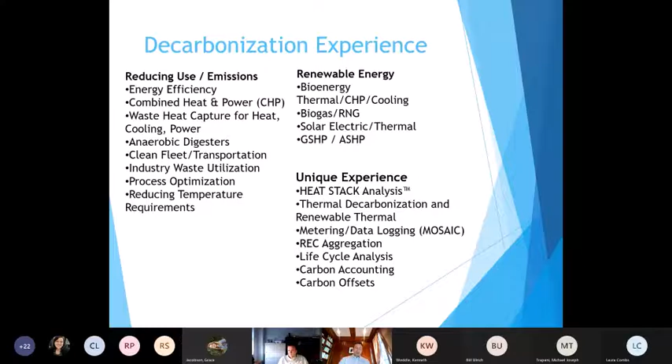Now, a quick outline of the presentation. I'm going to start by getting into very briefly the emission scopes so everybody's on the same page with that and why it might matter to a business. I'll spend the bulk of the time talking about how you would decarbonize. Scope 1 is what I'll focus on mostly because that's usually the hardest for an industrial facility to decarbonize, but Scope 2 as well a little bit. And at the end, I'll get into some tips or thoughts we have, having done this for a while, that you might find valuable as you go about your process of decarbonizing your facility.

So just very briefly on the scopes themselves. Scope 1 emissions are direct emissions by your business at a facility that you control. And so a real easy one to conceptualize here would be a natural gas boiler. The emissions out of the stack from that at your facility that you own are ones that fall into Scope 1.

Scope 2 is indirect emissions from energy purchases, usually going to be electricity. And so a real obvious one there is you purchase electricity from the grid and there's a power plant somewhere else that someone else controls that's emitting. You have to own part of those emissions.

And then scope 3 is upstream and downstream of your business. So think supply chain and distribution of products. And again, I'm going to focus mostly on scope 1 and a little bit on scope 2 today. Now, why might this matter to your business?

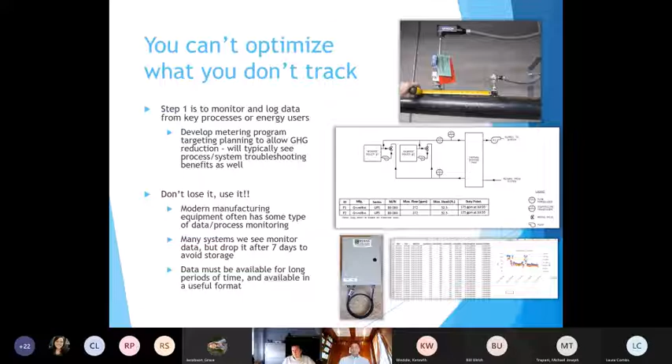It's pretty interesting. We go to a lot of facilities, and there'll be maybe one guy who knows how to get some of the data, and they're on vacation usually when we show up somehow, and then other folks aren't quite sure what they actually track, but they can probably tell us when the guy gets back. That is not a problem mostly for how folks run their facilities now, if you're working that way. But if you really want to decarbonize, that kind of thinking process in terms of how valuable that data is, is something we would suggest thinking pretty hard about.

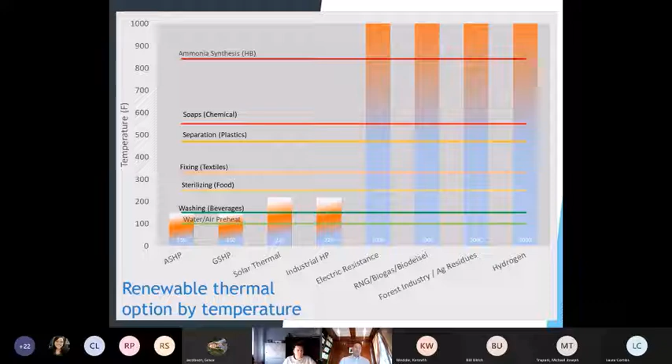I'm going to spend quite a bit of time talking about temperature now and how it impacts Scope 1 and some ways that you might approach it for your facility to help drive decarbonization. Now, if you look at temperature across all manufacturing in the entire US, around 30% of thermal demands that we meet in manufacturing in the country don't require anything more than 212 degrees. But in a lot of the facilities that we work in, folks are meeting these lower temperature needs with the same steam or other process heat source that they have that's really maybe 400 degrees, something like that. And that's not a problem. In fact, there's a lot of good reasons to do that. But if you're trying to decarbonize, we're going to show you why maybe that's something to rethink.

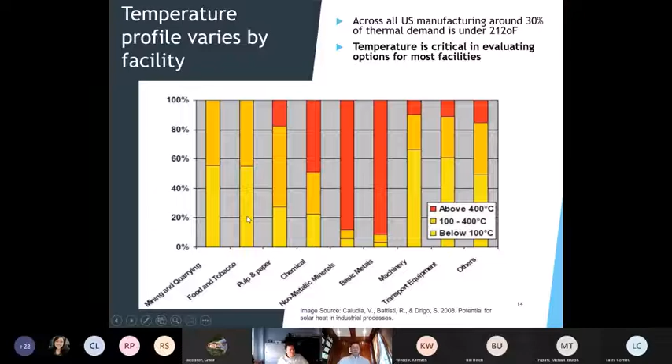And here are some other industries. This data is getting a little bit old, but it probably hasn't changed much. You can see some industries that tend to have bigger portions of their energy demands able to be served by lower temperature energy sources.

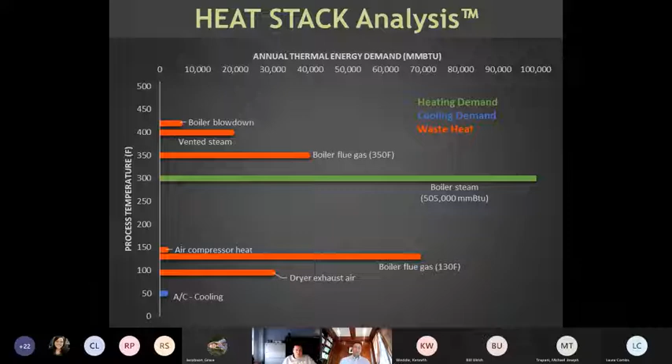In the red, we're tracking what the waste heat is leaving the facility and at what temperature it is leaving the facility. And then we have a little bit of cooling demand at this facility as well. So looking at it from what can we serve with lower temperatures: do we actually need 300 degree steam to serve the thermal demands in this facility? If we dive into the processes, track things a little bit, and look at actual temperatures and mass flows, we can figure out that we can segment out 25% of the total energy in this facility that we can meet with a temperature lower than 300 degrees Fahrenheit.

And in fact, if you look at things like the boiler makeup water, we've put that at 230 degrees roughly. That's where deaerators usually run, which is around 5 to 7 pounds of steam, 5 to 7 PSI. So if you're bringing in this water from a river and it's 45 degrees, you can actually stuff quite a bit of heat into that pound of water prior to it being 227 degrees. So really you could serve a bunch of that load with lower temperature as well. So anyway, these are the temperature profiles we picked for this facility. We took 25% of the natural gas use at the facility and said, all right, we can serve that with something that's a lower temperature.

Now, because we've been able to look at this heat stack analysis, and we see at what temperatures we have different heat sources and how much on an annual basis in terms of million BTUs we've got, we can figure out that we can capture some of this waste heat and stick it into these mass flows coming into the facility to essentially preheat them before they hit the process and our boiler steam. By doing that, at this facility it works out to around 18% of the total gas use we can just get rid of, because we can capture waste heat and use that to preheat lower temperature things and stop using 18% of the natural gas at the facility right off the bat.

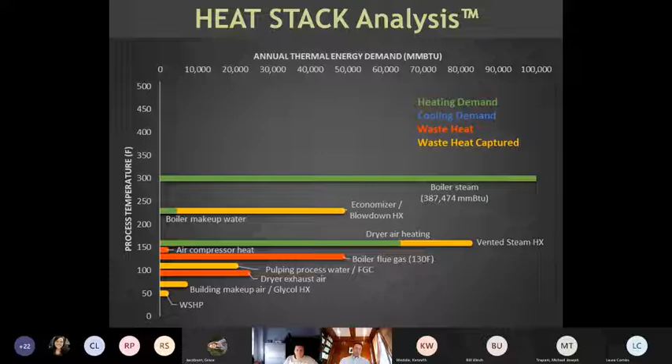The other thing we've done now, because we've looked at this in a more optimized way, is that we can see we still have some green here that we need to heat. Looks like here some dryer air. And we can do that with lower temperatures because that needs to be about 160 to 170 degrees. Now we can look at these options: which ones are renewable, which ones have the lowest greenhouse gas emissions, and which ones have the lowest cost. Now, 75% of the energy in the facility is still boiler steam, so we still have to tackle that. But we've done quite a bit of good for ourselves, and we can get a lot of this done in a way that saves us money as opposed to costing money.

So if you want to replace your natural gas use at the facility for the remaining 75%, now you might be looking at something like renewable natural gas, which in pretty much all cases is going to 2-3x or more your spend on natural gas on a per million BTU basis if you want the renewable version of that.

Now, again, we have opportunities like forest industry residues and things like that we can look at that can possibly save us money and be more of a silver bullet for us. But this general approach is one that we think is important if you're really going to try and decarbonize in a way that's cost effective for your facility.

And I'm going to spend more time talking about temperature. So it might become ad nauseam for folks, but I kind of enjoy talking about it. So we're going to talk about temperatures more and further, and why it's really valuable on a technology basis, by decarbonization technology, why it's valuable to have lower temperatures.

So a nice one, and this is energy efficiency, people have been doing this for a long time, is condensing boilers. And you can condense other exhausts as well. So we think it's really great to go in and get like dryer exhausts and things with lots of latent heat in them and get that latent heat pulled out and stuff that into energy mass flows that are coming into the facility somewhere. But this is a good example.

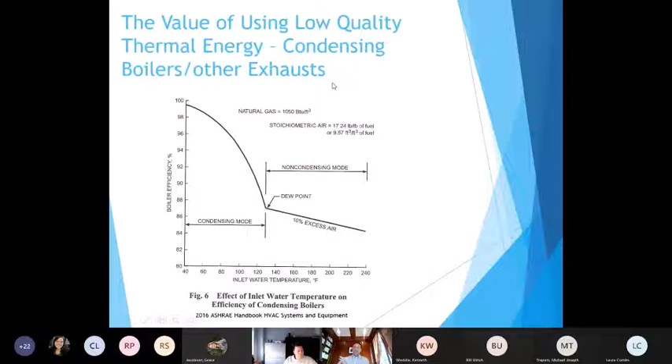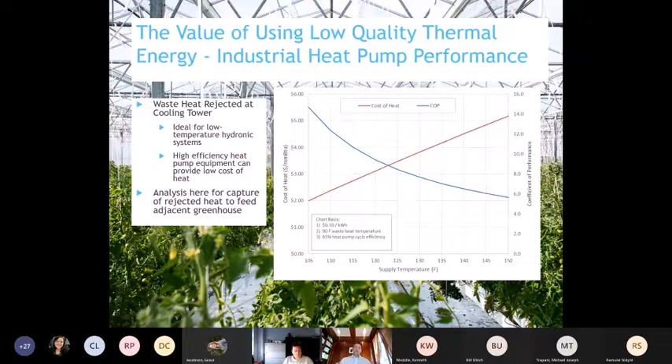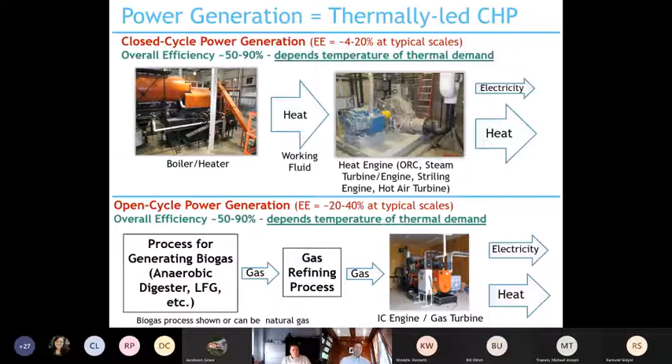One more thing I want to mention, I've started to shift between scope 1 and scope 2 a little bit here because we're doing some electrification with that industrial heat pump, where we're taking thermal energy out of the facility, so that's reducing scope 1 emissions, but we're using a little bit of electricity, so we're increasing scope 2.

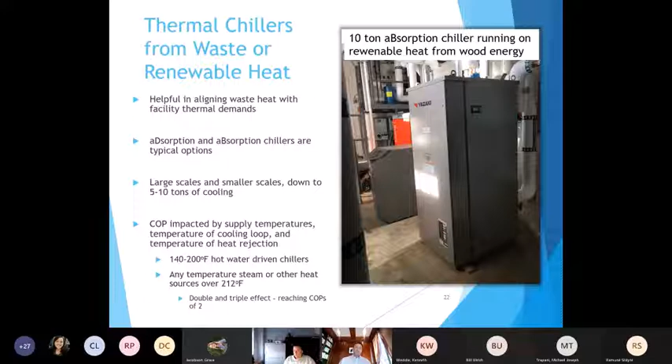But you can now use lower temperature energy that's a waste and really drive a cooling process to help reduce scope 2 emissions at your facility. So I started to dip into scope 2 a little bit from scope 1.

Just going to touch on this briefly, and clearly it's very important because at many facilities, greenhouse gas emissions from scope 2 from your electric purchases are the bulk of your greenhouse gas emissions. So clearly very important. One thing I would say is that at most facilities, whether they've done efficiency or not, there are more energy efficiency projects you can do. The real question is, are they economically viable?

And so that's really the threshold that usually tips what efficiency projects you can actually do versus which ones you can't. The other thing I'll say is that now's a good time, now's a good opportunity to start to seek chances to capture waste heat and do waste heat to power.

There's a new tax credit that's available that's making that more economically competitive. So if you have particularly high temperature waste heat, you can capture that, make power. And if you can segment out some lower temperature needs, you can also take the energy out of that prime mover that was waste and that's lower quality now coming out, and maybe offset some of that scope 1 emissions as well with that.

But the reason I focus less on scope 2 emissions overall is that increasingly you have an option for market-based ways to drop your scope 2 emissions. So depending on the state you're in and which utility you have, it can be somewhat easier or not as easy to come up with a market solution for that. And in a lot of states, we're seeing fairly cost competitive electricity that you can tie through contracts to be renewable.